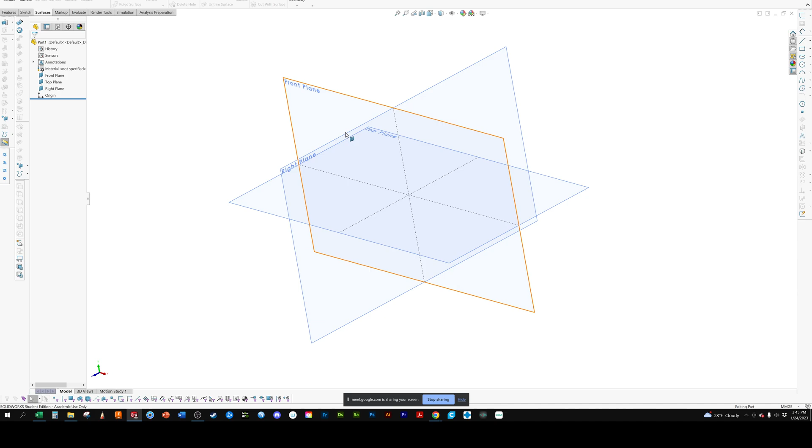So part of this too is going to be a little bit reinforcing how to build a surface model. So at the heart of it, what I'm going to do is build a six-sided model. Picture a cube but with some form to it. So, excuse me. So what I'm going to first do is I'm going to simply build my top surface.

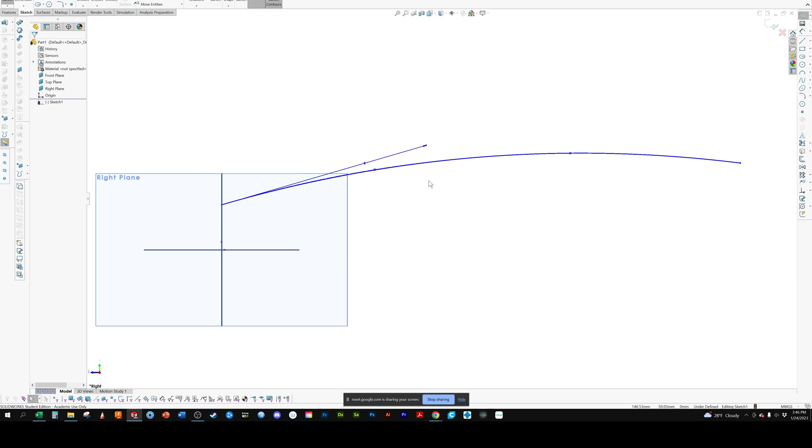And I still saw a lot of people creating curves like this with these extra points. I want you guys to try to be very cautious about that, okay? Because it makes it hard to manipulate and to edit. So if you're going to do it, you can see here, I can get that almost perfect with only using a singular, with a start and a finish. So I want everyone to try to really be cautious about not going overly complicated with things.

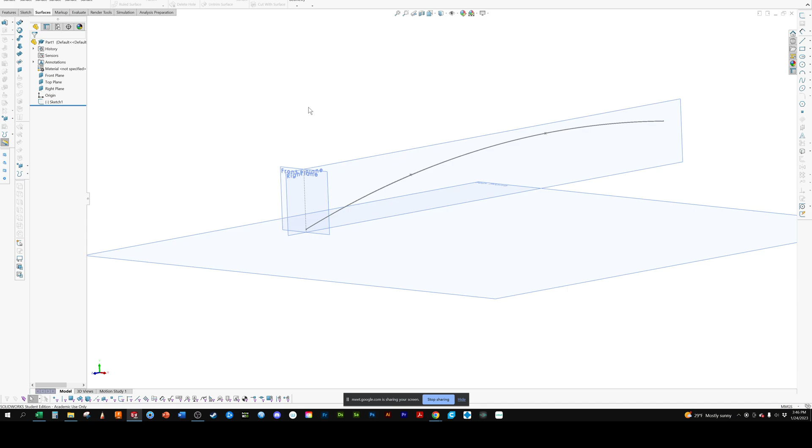So I've got that, and now what I'm going to do is I'm going to build the section, or the front portion for it to sweep over. Now, here's something that I want you guys to learn as we're building things. If I come in, well, you know what? No, I'm not going to share that right now. I'll save that till later.

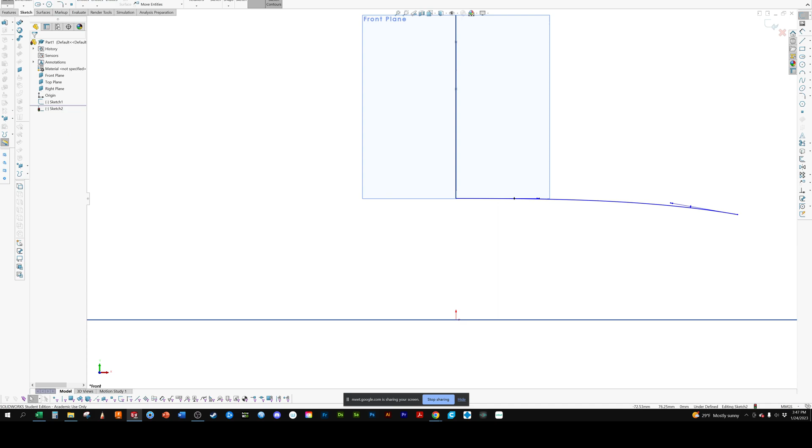So what I'm doing is I'm just building the side profile. I need this. I don't want a dip in the center because I'm going to sweep it over in half. So I want to make sure that that is mirrored or perfectly horizontal. And we've talked about that in the past. We don't want that V. We're just going to mirror this about this.

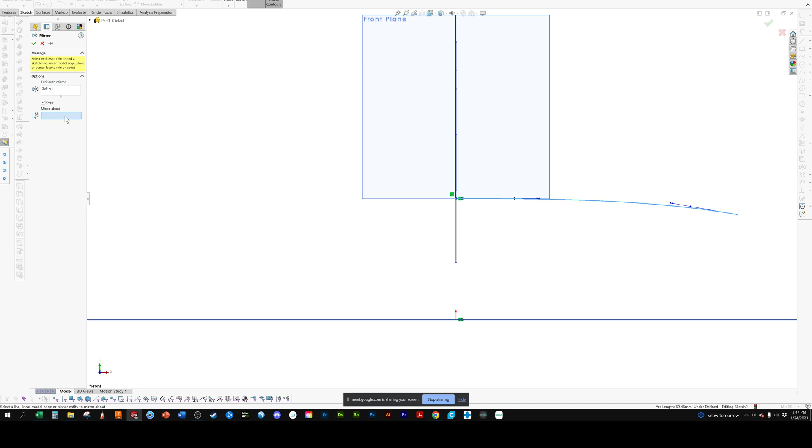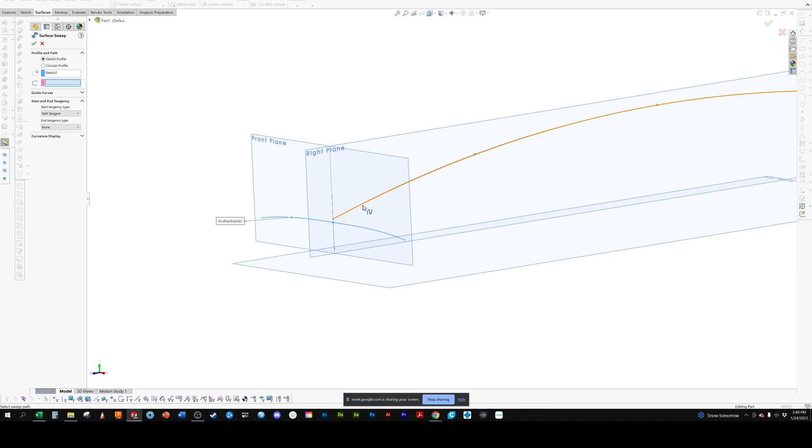So fairly simplistic top form. I can simply use a swept surface here. Get my shape. I'm not going to be too worried about everything being pinned. Now, keeping in mind again, and we'll get into this later, what is the controlling point? Do I want it up here? Do I want it down here? So we're not too worried about that right now.

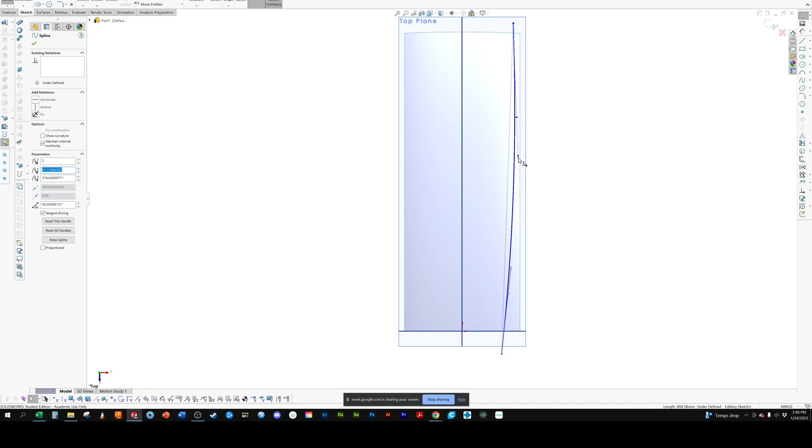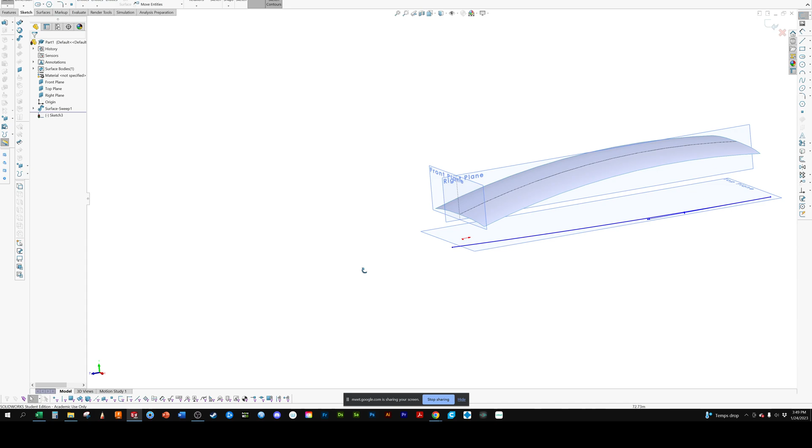So you can see what I've done is I'm just building up the top shape to build my sidewalls because I'm going to sweep another surface. And you can see what I'm doing is I'm building it. Oops. Bear with me here. I don't know what just happened there. Oh, it's because I'm still in this. There we go.

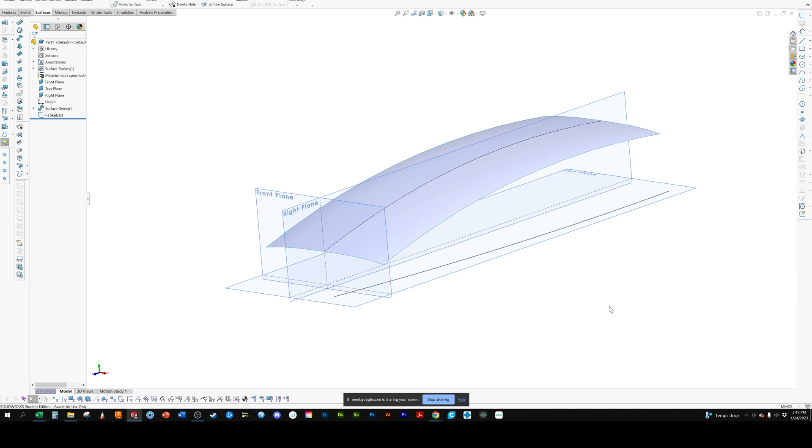So what I'm doing is I'm building beyond my surfaces. And we'll talk about why we want to do that here in a little bit. And you can see for the most part, right now, I'm just using swept surfaces.

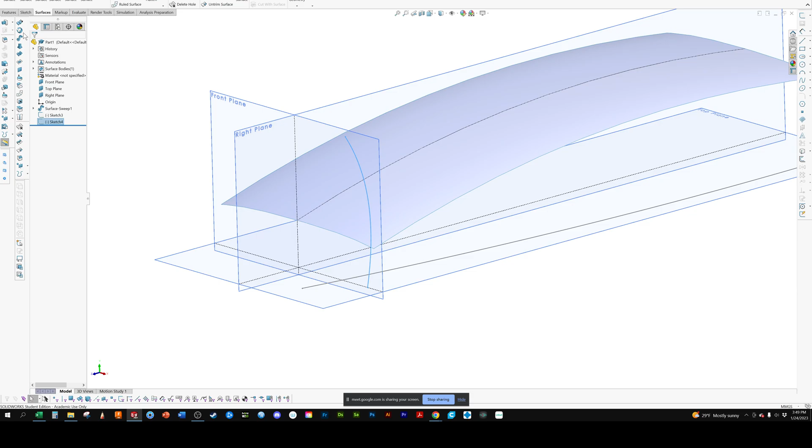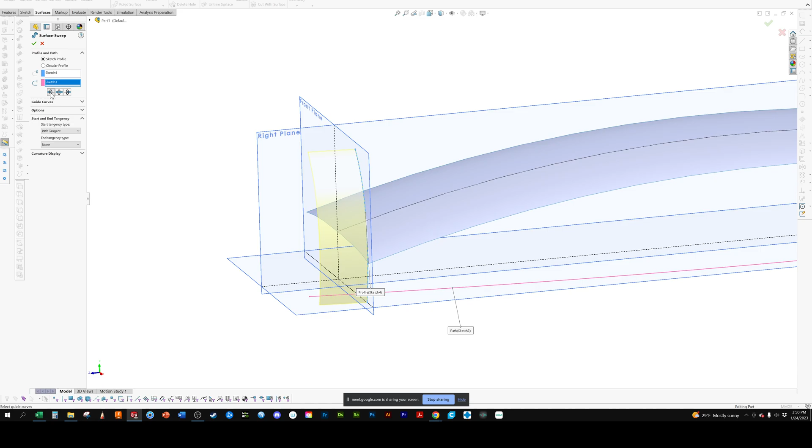And again, since I'm asking for this one, it wants to know, do you want to just go to the left, just to the right, or all directions? We'll do all directions. Now, here, I don't actually want this to be the path it takes. I want it to follow this path. So I need to go in and reverse these. Because I want to use this to trim back. And you can see there's going to be a lot of steps that we're doing to this.

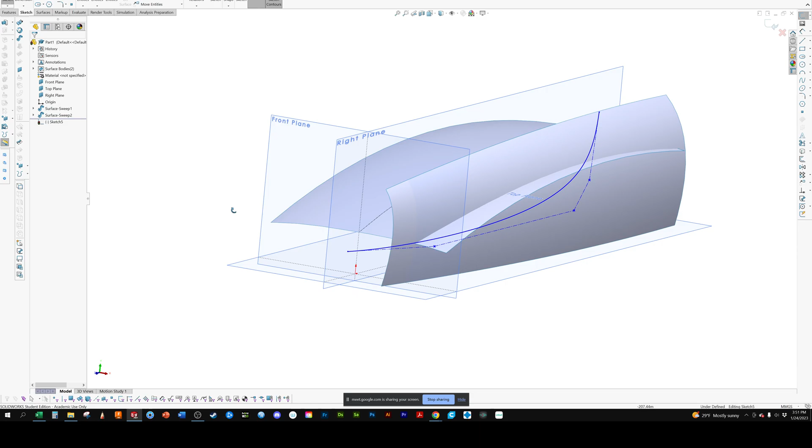Now, you saw before where I did the sketch across the whole point, and I mirrored that over. The question is, is that necessary? It doesn't have to be, because I can just mirror all the bodies over. But I always want to make sure if that is the case, oops, and I grabbed the wrong tool.

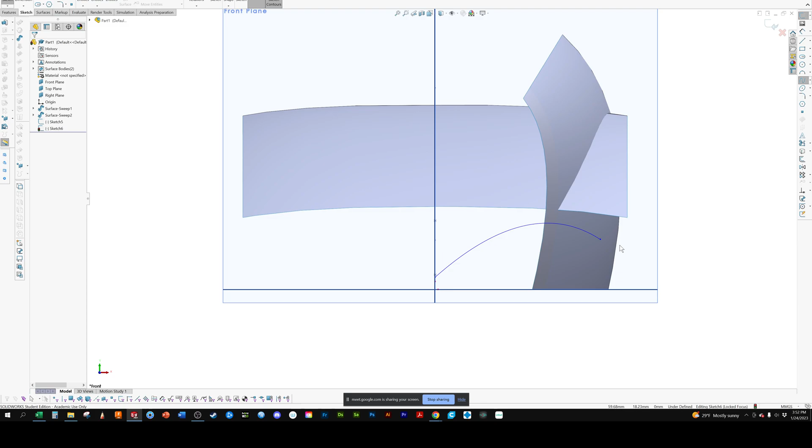Right now I'm not looking at my curvature combs, and partly because of that I pretty much know what it's doing. If I come in here, I know it flattens out, and then I know it's going to do that whale tail over here. So as you guys go, you're going to slowly learn...

My graphics card is having an issue. Bear with me here. You guys are going to slowly learn more and more and see what's happening. Why is this not... oh, that's why.

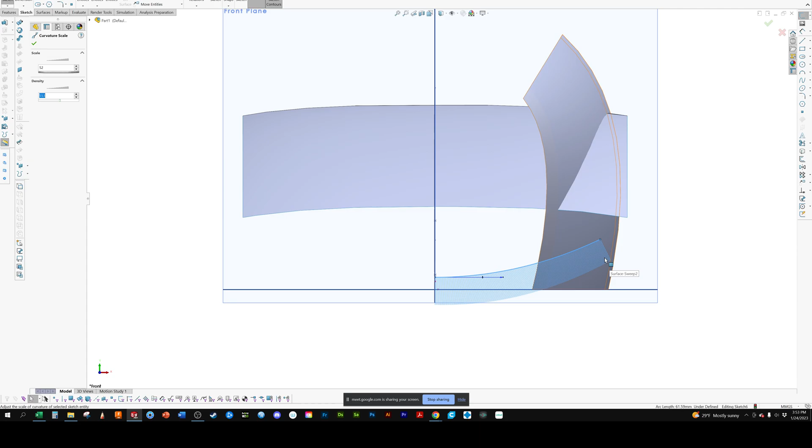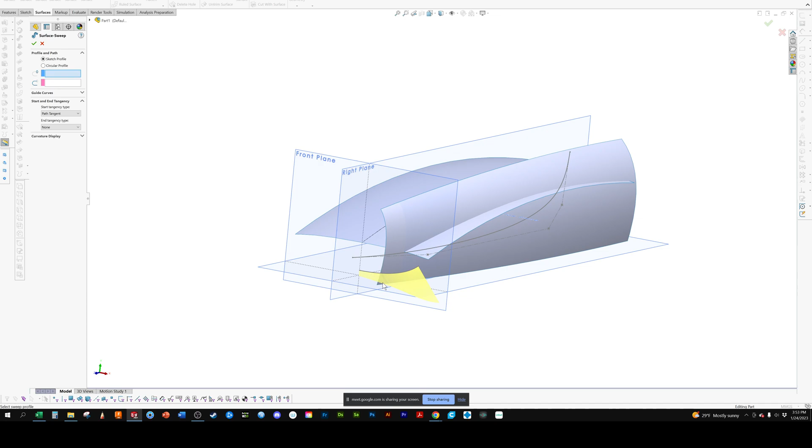What you can see is I'm creating all the sides. And you can see one of the things that's happening, if I come in here, this surface doesn't go far enough outward. It dives back in because the length isn't right, because of the surface form coming out.

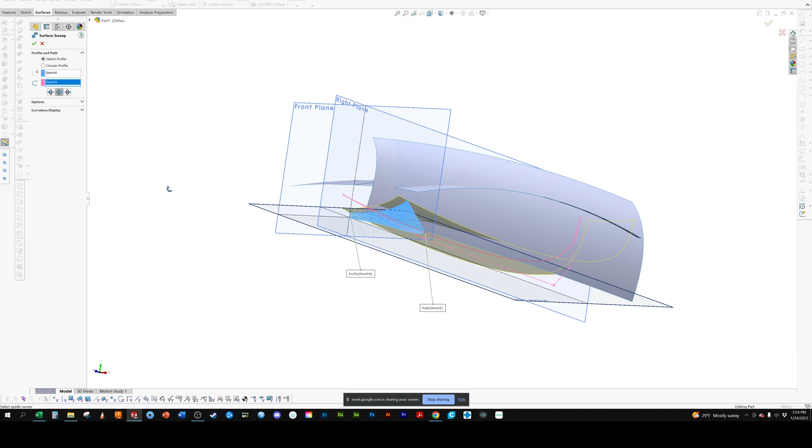So we can come in, I'm just going to edit that a little bit, and pull it out.

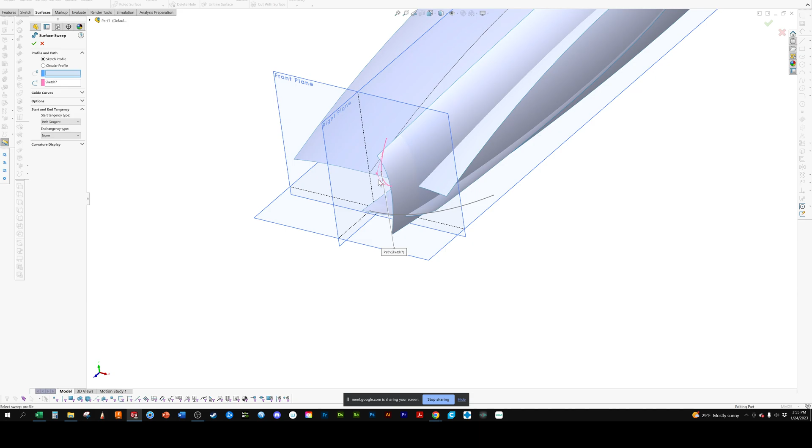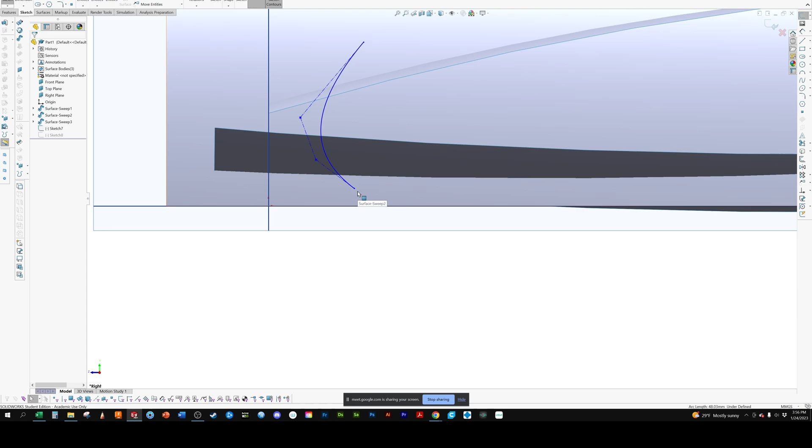Okay, so now basically what we've got is all of our sides to this.

I'm going to actually blow this away here for a second.

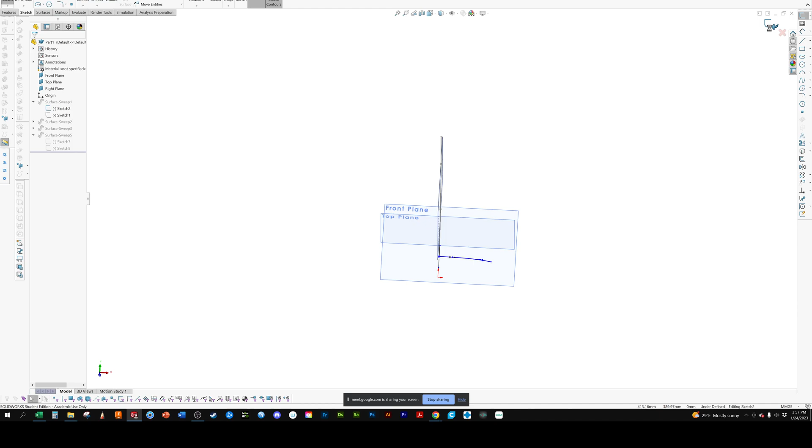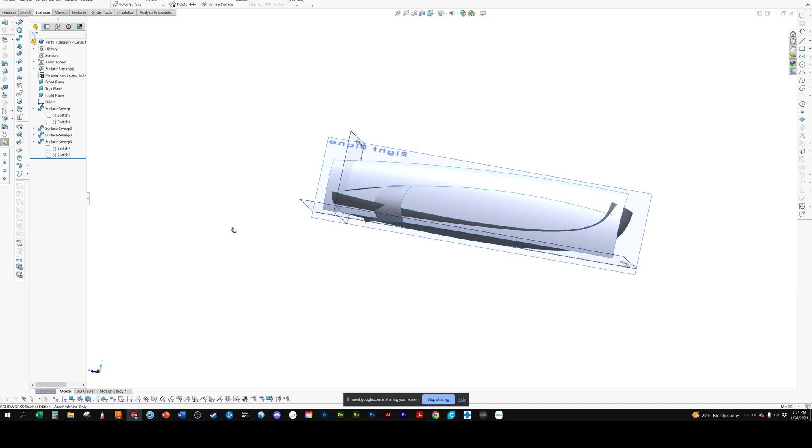So what we can do, you can see very simply that we've built our surfaces that we defined, and we kind of overbuilt them now. So we looked at each individual surface as an intersecting shape: we've got our side panel, top panel, front, and bottom.

Now, I'm not worried about radiuses at this point. This is me roughing in a form to see what I like and what I've got. But what we can do is we want to get rid of all the excess now.

So it's a matter of coming in and going surface trim or trim surface, and we're going to go standard. What that means is that you trim one at a time, so I can use this tool and select one thing.

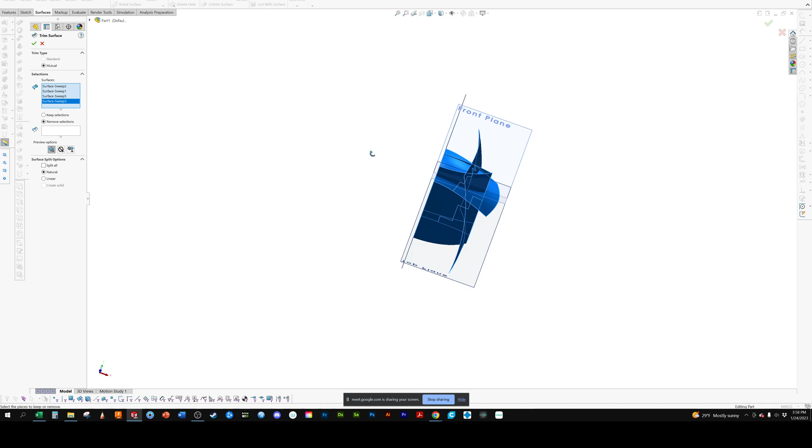And that's what happens. If I do mutual, what that means is I can select multiple surfaces and it's going to understand what it intersects with. I can come back and then select remove, and you can see here it highlights where that edge is, so we'll remove that.

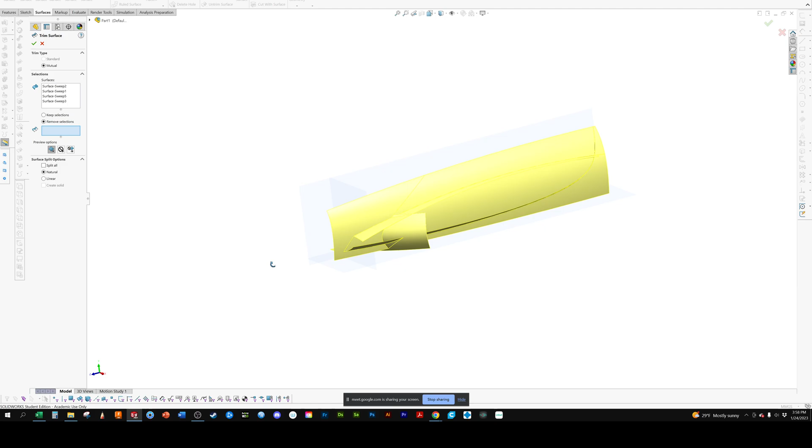And it looks as if one of our, oh no, maybe it does. It looks as if our surfaces don't necessarily fully intersect where we want it to be. So if we look at it, this top one doesn't come far enough back.

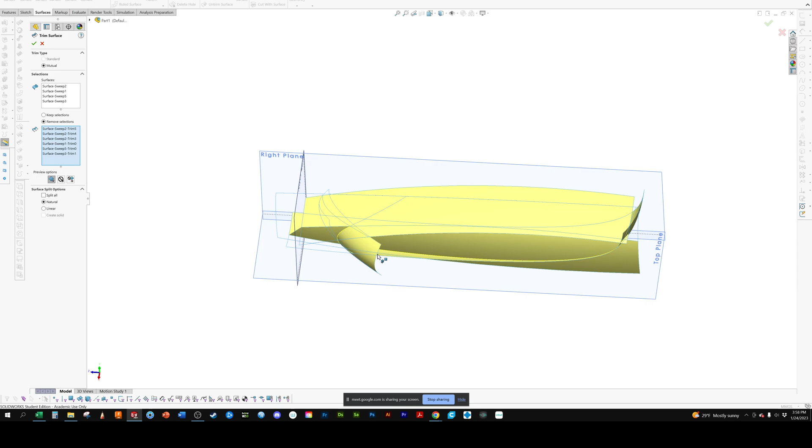We'll select that, because that's the one trick to this: we need to make sure that everything intersects. This can be somewhat tedious as a method, and it's not what I use to find the form, but it can be very useful.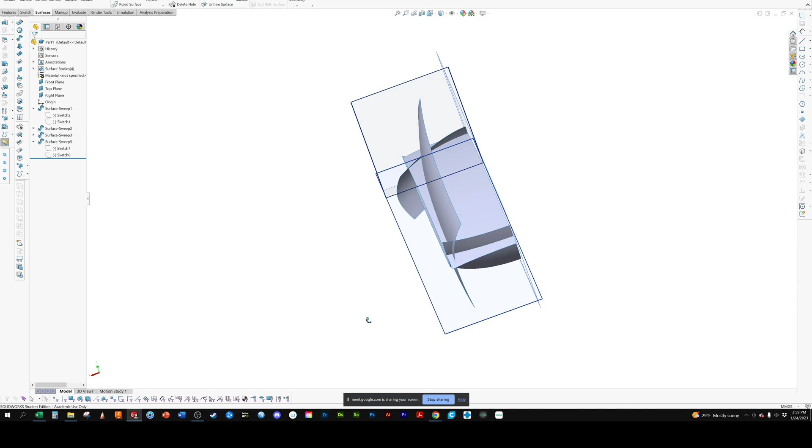And for this, let's actually trim it in mutual selections. So we're going to trim, and we're going to say all the surfaces. We're going to use that, and then what we'll do is...

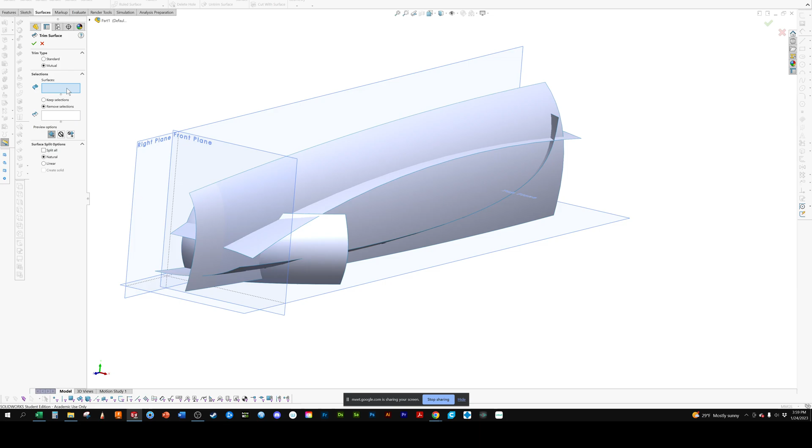Instead of removing, we're going to select keep, I think that'll be easier. So we want to keep that, we want to keep that, that, and that. Let's see if we got it right. My apologies if we didn't. There we go.

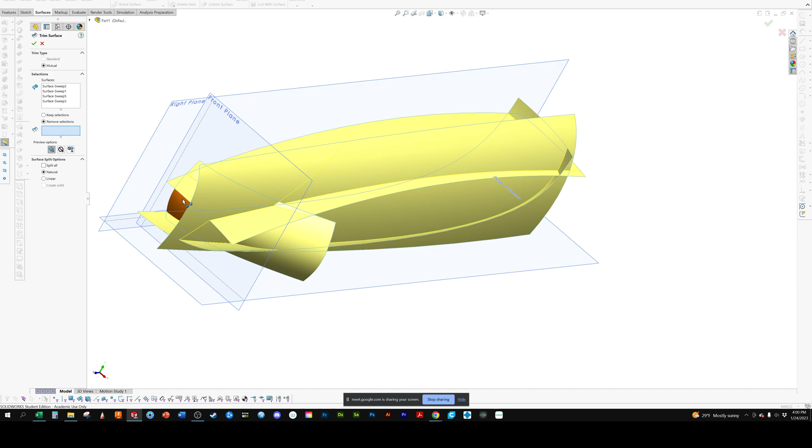So now you can see we've got our base form here with that trimming back. Now, the advantage that we have is if someone comes and says, well, I don't like the width, I need this to be back a little bit further.

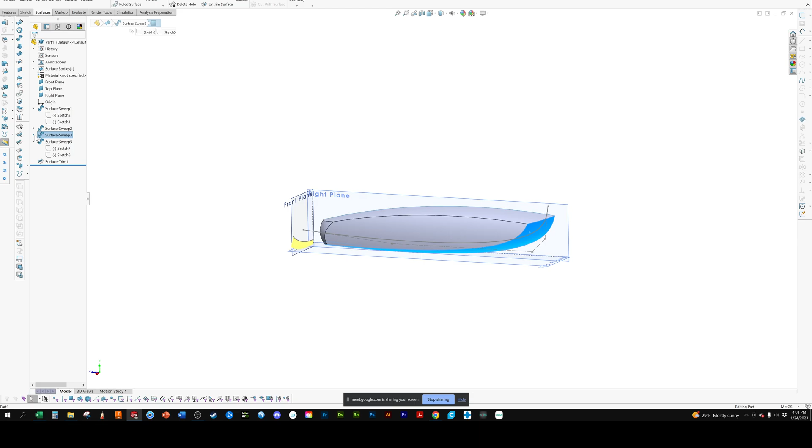So if we come in and edit this sketch, we can pull this back. Now, as long as it still intersects with these pieces, we could pull this back a little bit and everything is still going to update properly. We've got our new shape.

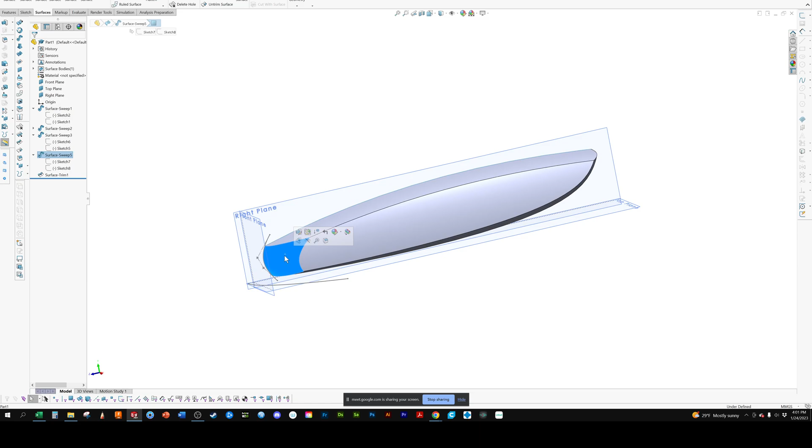We can come in and take this one and say, you know what, we want to move this forward a little bit, or we want to do this. Doesn't mean it looked good, but you can see now that I am updating things as we go.

Now, we can add knockouts, but this is going to be, hey, this is the first rough form. And this could be simply a razor or something, I don't know. But we have that ability to then start playing with the forms and manipulating it a little bit.

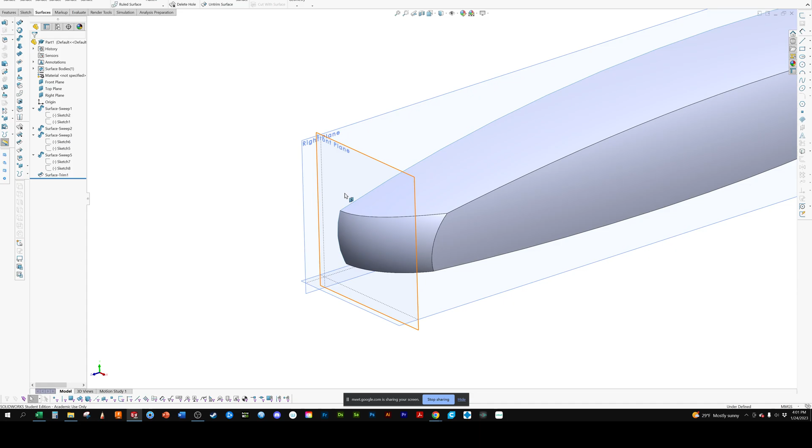So if I come in, I'm just going to make this into a solid quickly because I want to toss on some quick radii. So I'm going to come in and do a planar surface because I just want to worry about half. We'll stitch that together.

Okay, so now what we're going to do is we've got our form. It's a simple form, we can toss on some radiuses. I envision this, and the reason I didn't add all the radiuses in the sketches, as we talked about, is if I made this spline part of that radius, it would be hard to manipulate downstream.

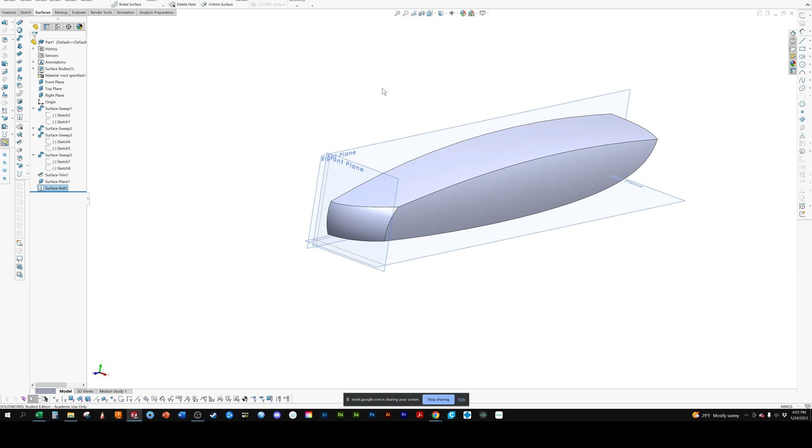Versus I can come in now and use the tools. I'm going to go with the fillet type. I want this to be... let me just see. We're going to make it curvature continuous.

And if we look at curvature continuous, circular is exactly that - it's a 3-point arc. Where curvature continuous takes the arc, follows this surface a little bit, and then down into this surface.

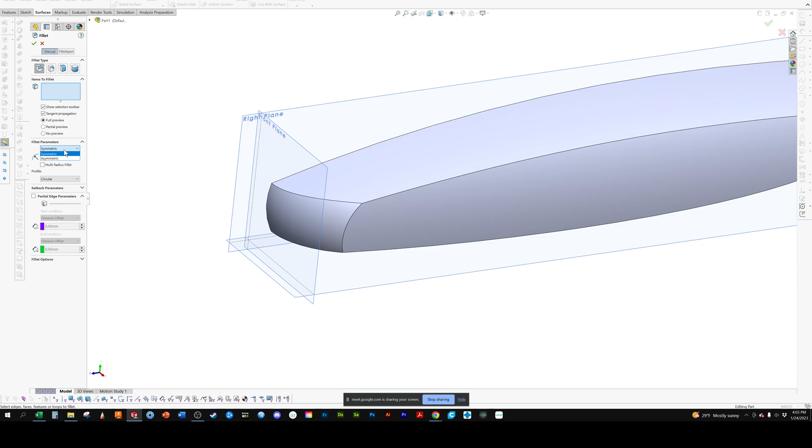What we can also do is come back and say we want it to be asymmetrical, which means instead of being 10 millimeters at the top and 10 millimeters at the bottom, we can adjust it. And we can get more of a sweep in there.

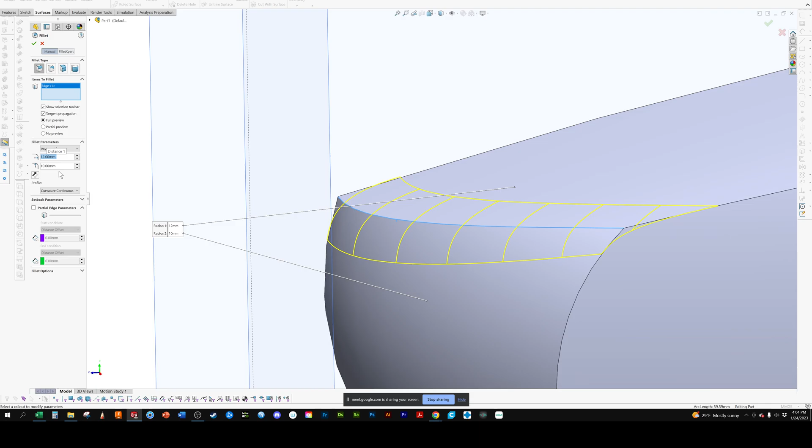Now you can also see, if I'm making this kind of a forward going motion - and you can see here, for whatever reason, it does not like what's going on.

So what we can do when radiuses like this happen, we can put that in. And we can say, do we like that? Does that look good or not? Let's actually come in and open it up. So radiuses can be surfacing too.

So I'm going to bring this into KeyShot quickly. So I know it doesn't look good - I don't actually need to bring it into KeyShot to know, but I want you guys to be doing that. And again, right now...

Why did that not go in there? So much for you guys right now is subjective - you may think it looks good because someone hasn't explained to you why it doesn't necessarily look good yet. I'll talk to that a little bit here in a second once I get this to come in properly. There we go.

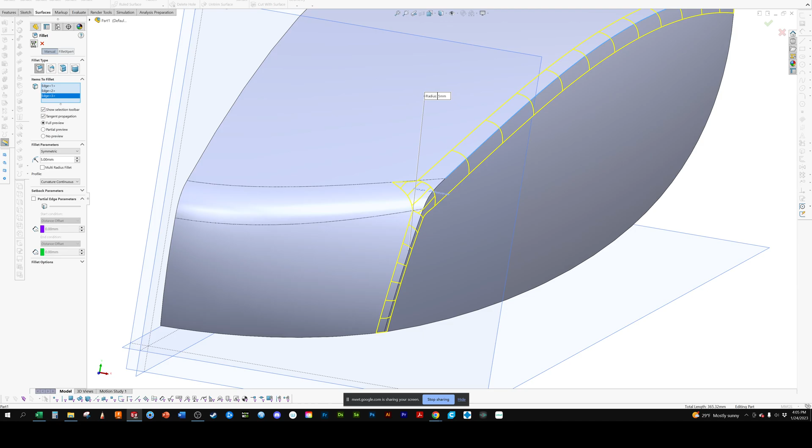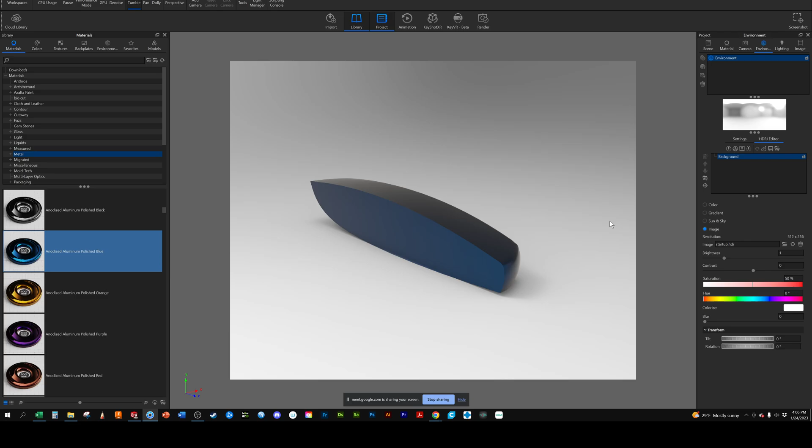So the reason it doesn't look good - see how it has no direction? It kind of gets in there, it doesn't know what to do, it's got that wobble. That's what you can see in this view. It looks decent because you can kind of see a highlight there, but you can see here how it stops and has a weird build. So we want to avoid that.

If my view is I want to have this radius come up and go along there, but I want it to follow this path first, what do I need to do? Now, many times - another command we can use, and I think someone had played with it - what we can do is tell the software we want to do a face fillet.

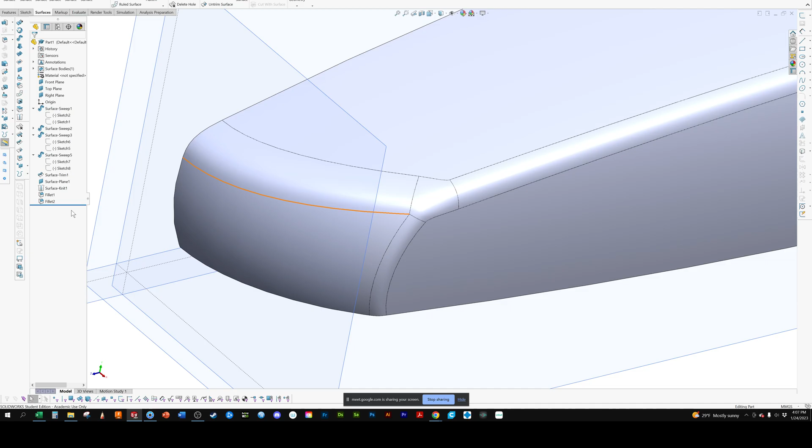And what we're going to do is select the faces that we want it to follow along, so it gives the software a little bit more information. So if I select this face, this face, this face, and we're just going to leave it dead end there. Then we'll come back and select this face. What we want to do is - see how the arrows are pointing outward? We want them to point inward, because the radius isn't going like this, it's going like this. So we just want to come in and flip those face directions, and flip that face direction there.

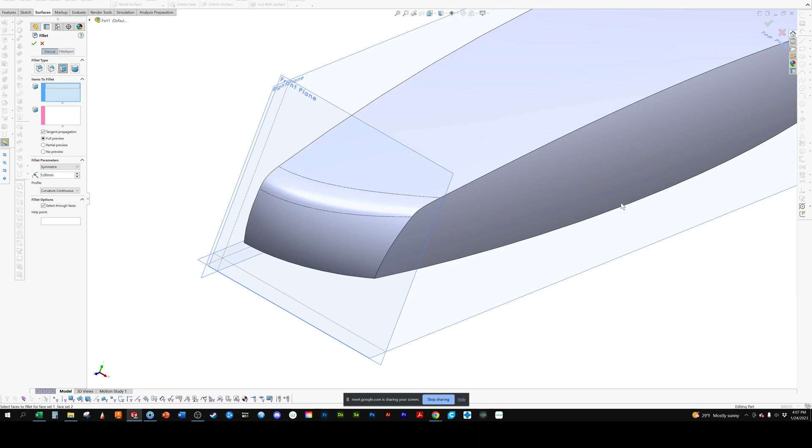Huh, is there an issue there? So it looks like there may be some issue with this fillet. Let me just see something here. We're going to come in.

As we talk about form, this is where it's extremely important, because you want everything to be nice and smooth, so you take the time to do it. Surface modeling can take much longer than solid modeling in my experience to get that shape and form.

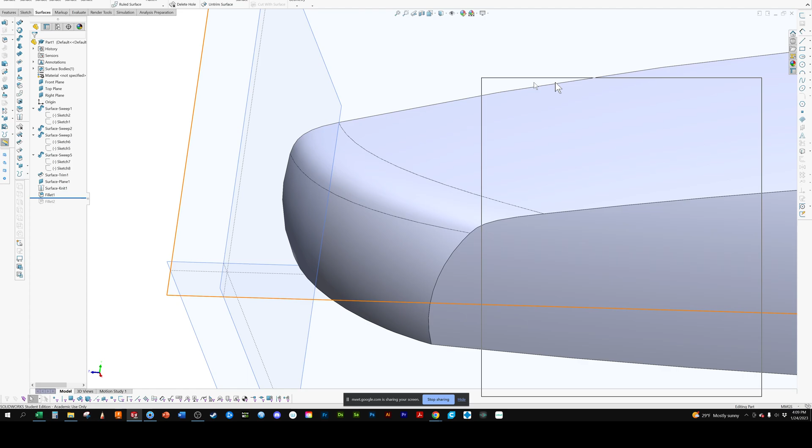Sorry, I'm just over here - what I'm doing is fixing my image quality to make sure that I'm seeing something right, because it looks as if it's doing it there.

So what we're going to do is - I like that radius, but we're just going to scroll back here. It may be that my form cuts too far over there, but I like that. So I'm going to still try, and we're going to come in and go face fillet there, and there.

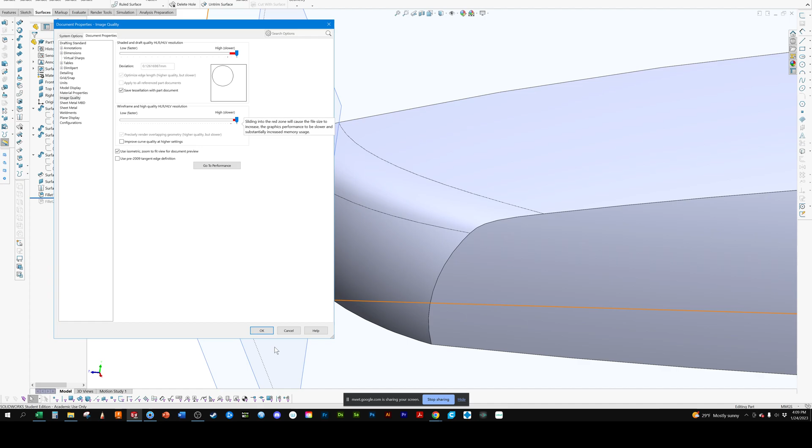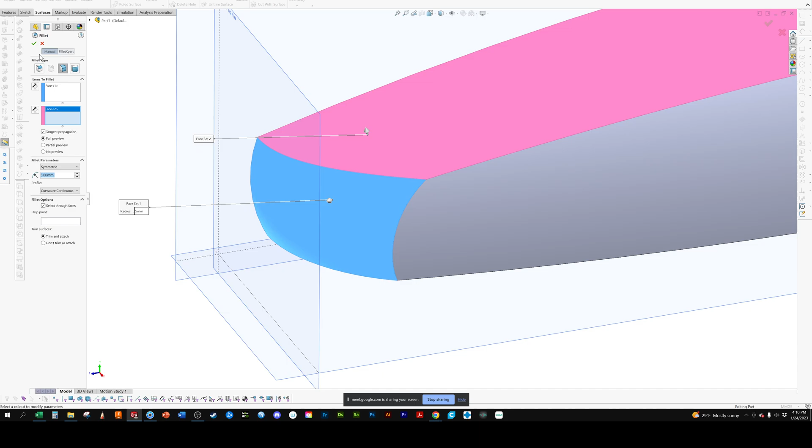And I think we had that at 10. Okay, so now let's see if that works.

So again, first thing I want to do is I'm just going to try to do a normal fillet. And you can see that we're still getting that problem going on in there. And this is the nature of the shape of the geometry. So let's come back and we're going to do the face fillet.

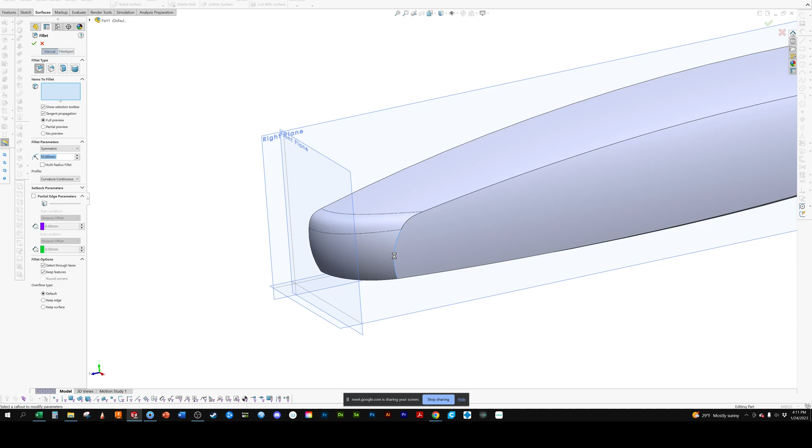And it's not going to like it. Okay, so it does not like it. This is where I'm going to show you guys something, that as we do the surfacing and build things in, I'm not going to let that change what I want to do. So what I'm going to do is come in and cut out the space, and put in my own fillet.

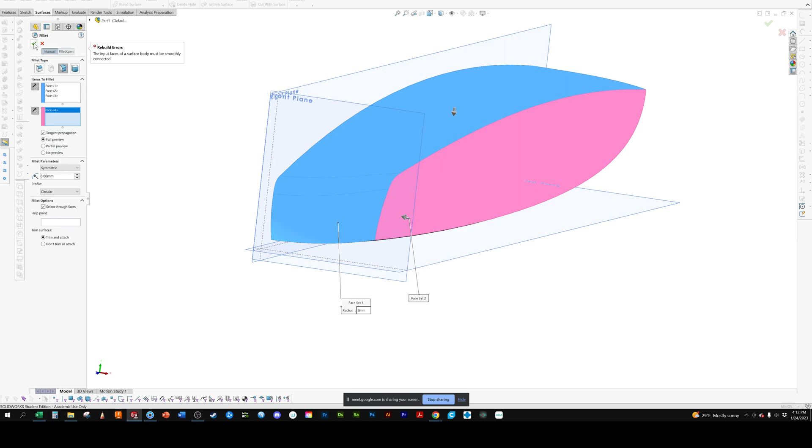So what I'll do is come in and draw a sketch, and I'm just going to do this really quick. And I actually have more control over this, and there's a variety of ways I can do this. I could draw this on, I could offset surfaces, but the point here is I just kind of want to show you, because we talked about this before, now we're going to do kind of the patch.

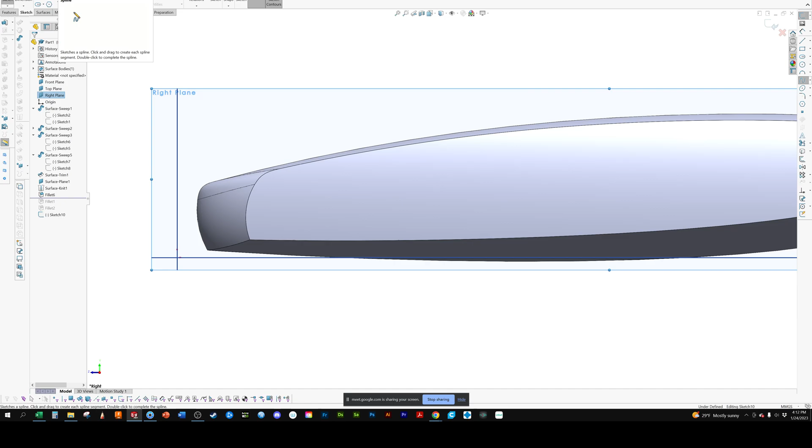So we'll go insert, curve, split line. Oh, whoops. I forgot this has to go all the way through.

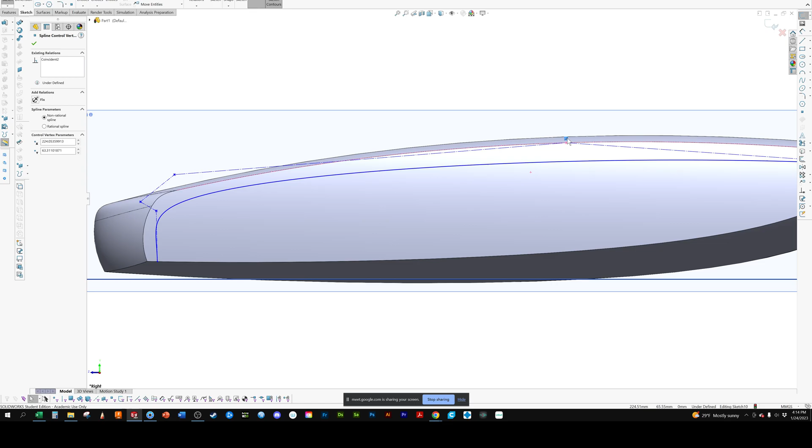So we can come back and trim out this. Sorry, what am I trying to find here? Delete face.

And basically what I'm doing is I'm creating the path that I want these surfaces to follow along.

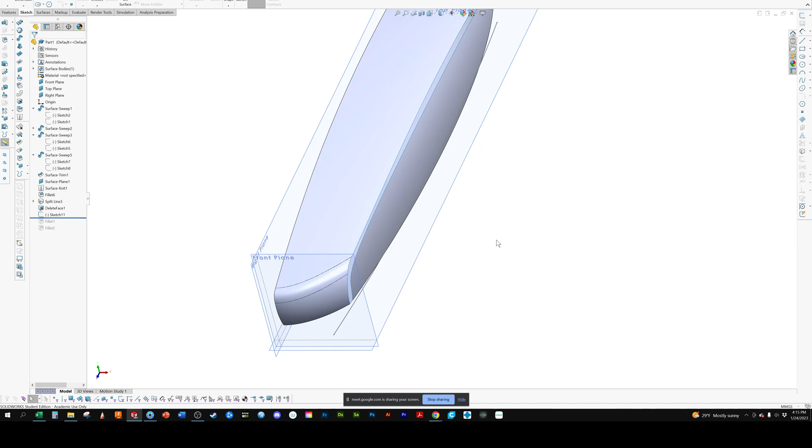But if I come in, I now can, if I want, create a curve along here and sweep it. So if I come in, for this, what are we going to do here? Let me just do one thing, because what I want to do is sweep the curve from here to here, but I need it to be able to stop at a certain point.

So I'm just going to come in on the side here. Yeah, let's just do this. So this is kind of ugly, but it's going to get my point across.

Okay, so what I can do now is come in and loft from that edge to that edge. And if you recall, we have start constraints and end constraints.

So I can say on this start constraint, I want that to be tangent to face. And it adjusts it. I can then come over here and say end constraint, I want that to be tangent to face. So now it's starting to build in that radius. Now I can adjust these and get the different shapes.

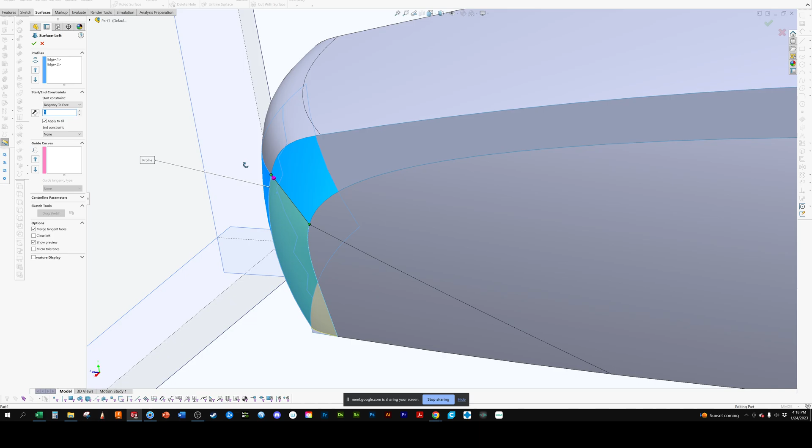What I can then do after that, let's say that's what I want, I can come in and do a boundary surface. Clear that, and I can fill this gap in. I'm going to say, hey, I want this as my path, and I want to follow this.

Oh, for some reason it grabbed that. There we go. And I want it to follow this.

And then part of the reason why I did the boundary constraint is because I'm going to try to make it, and I'm going here really sloppy, so I don't know if it will. I want it to be tangent to that face. And then at the same time, I want it to be tangent to these faces. And remember, that was the advantage of the boundary surface, because I'm giving it boundaries, but I want it to be doing certain things. Now, it's still not very pretty.

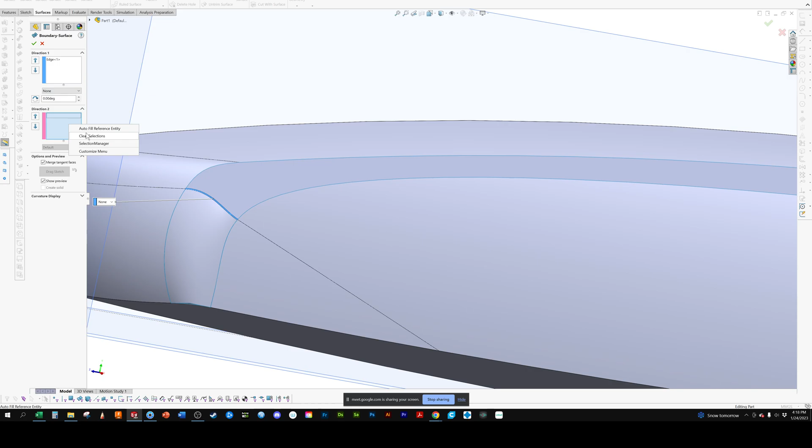Question? I was just going to ask at what point, because it's like that troubleshooting where I feel like I'm just not there yet. You know what I mean? Like figuring out that problem there. Oh, so here's the reality. I'm faster than every one of you. It's not that I'm better than you. It's that I've run into more, oh, this doesn't work. So it takes time. As you learn the tools more and more, it's going to get better and better for you. So it's not something that's going to happen overnight, unfortunately.

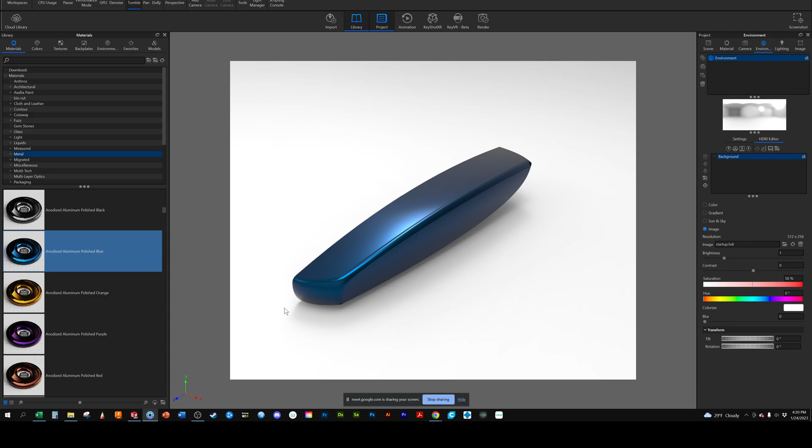When I first started 3D modeling, imagine the forums were out there. You know, like chat groups, user groups. I was on there constantly. So as we go, it's just going to be a matter of how many different ways do you know how to do it? And do you know what the problem was? I think the problem there is I was asking it from a geometric standpoint to do something that was not the nicest. Partly because I haven't thought this model out very well. Does that make sense? I know it's not a great answer to say, ooh, tomorrow you'll get it. Yeah, no, I got it.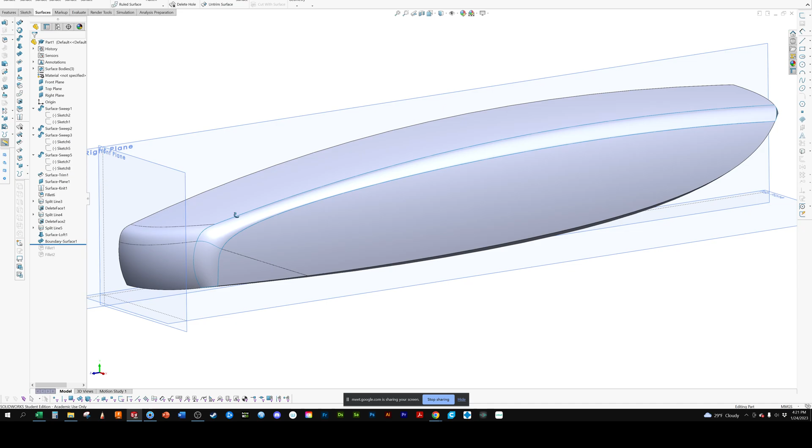Thank you. Yeah, okay. So what we end up with now is something that is just ugly. So here's the hack. I don't know why it's all faceted like that though. This is just going quick. But this is a sketch model. Sometimes it's a matter of just the rough sketches. And you guys will do this as well. This is my first pass. This is what I wanted to get. This is the form. Okay, what else do I want to do with this? It's not the prettiest, but it's a sketch model. It's for me to get my workflow. It's for me to get the overall size, shape, and feel of it.

I may prototype this purely to put it in my hand. If all I'm going to do is put it in my hand to make sure I got the ergonomics right and the shape right and the feel right, well then I don't need to make sure that my highlights are perfect. I don't need to make sure that this here is perfect. It's a sketch model. It's loose, it's rough. I could take this and bring it into KeyShot, turn it into a shaded image, and then very easily start sketching over top of it. Okay, I like this overall form. I think it looks good. What's it going to look like now instead of me doing more details, but coming into Sketchbook?

Let's just do this here quick. No, I'm not going to even bother to do that. Coming into Sketchbook and then using this model to sketch over top. So this is what we were talking about before, where it's a quick model. You bring it in, some quick surfaces that we laid down. You can start sketching over it and be like, okay, well, you know what? Maybe I don't like this form here. Maybe I want that to be, here, let's do this. Maybe I want that to be a little bit more bowed here, in the middle,

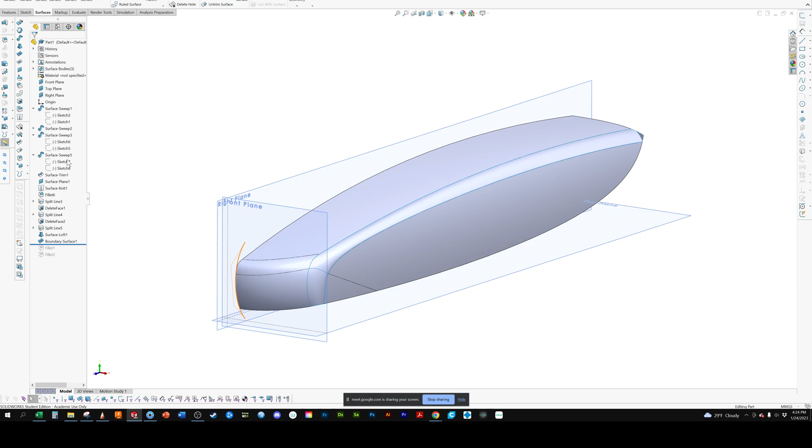and I'm gonna actually do what I say don't do, because I'm just doing a quick sketch model. I'm gonna drop in a spline point, and then I'm gonna say maybe I just want this raised up a little, because I want that more of an arc. So there, now I've got a little bit of a different look to it. It's more rounded. I could save this out. Maybe from a standpoint here, I want this to dive down more.

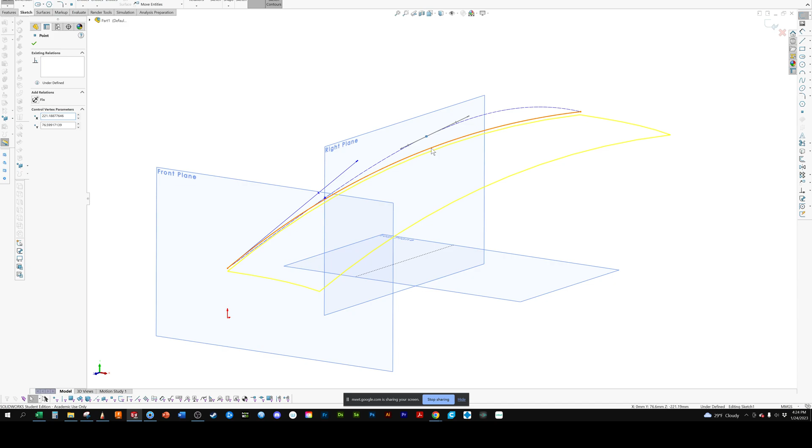Maybe we wanted to do more of a hump up in the section. You know, now, I moved this in so the trimming didn't work. So it blew up a few things, but that's partly because I wasn't thinking. But now all of a sudden, I'm getting a different feed, form, and a shape. Oh, I start liking that a little bit better.

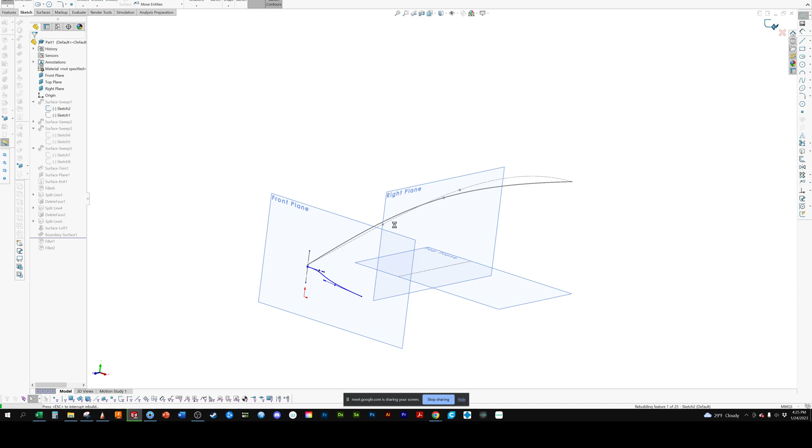Let's see, can we fix that easily enough? No. But now I could take that form, and now all of a sudden you see I'm getting a variety of quick forms that I can use to sketch over top of. I can do this again and say, okay, well, maybe I want something like this, and I'm just going to scroll back here.

When you're doing the rollback, do you roll back to the sketch that you want to edit? Oh, yeah. So what I'm doing is I know what sketch I did. So like normal, here's my top surface, my side surface. So I kind of know what sketches are what ones. So all I'm doing is I'm not even necessarily rolling back. I'm just editing that sketch.

And you can see here, I don't always have to go in to edit the sketch anymore. But, well, here, let me show you something. So I can actually just go in. See, now if I start going too wild, I've blown it up. There. So if this was the base form, I know that, hey, I can go in and I'm going to edit this a little bit.

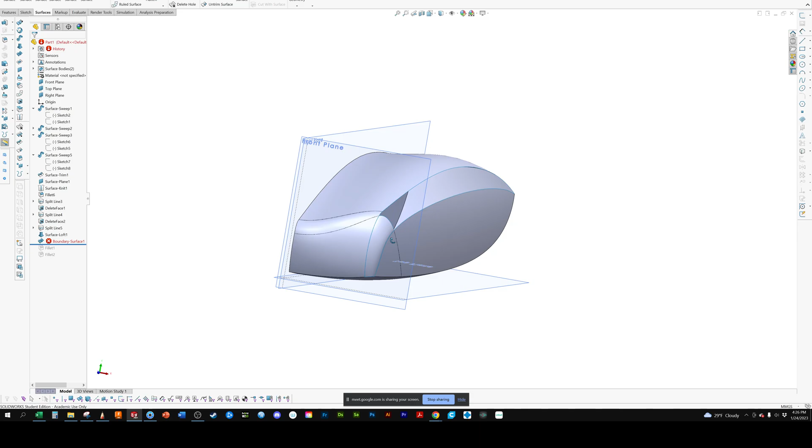I can come in and say, well, I want that to kind of curl. I want that to curl under more. But you can see there, I blew it up because I pulled it too far out. So I didn't overbuild my surfaces enough for that dramatic of a change. Does that make sense? Yes, it does. Thank you.

Okay. I've had some times where they're like, oh, you built this so that we could do... oh, we just need to make it like 4 inches wider. I'm like, I didn't build for 4 inches. Who the hell's making 4 inches wider on a blender? And then you can go in and add your other details in there. But you can see here how by overbuilding it, it allows me to make some different forms and different shapes.

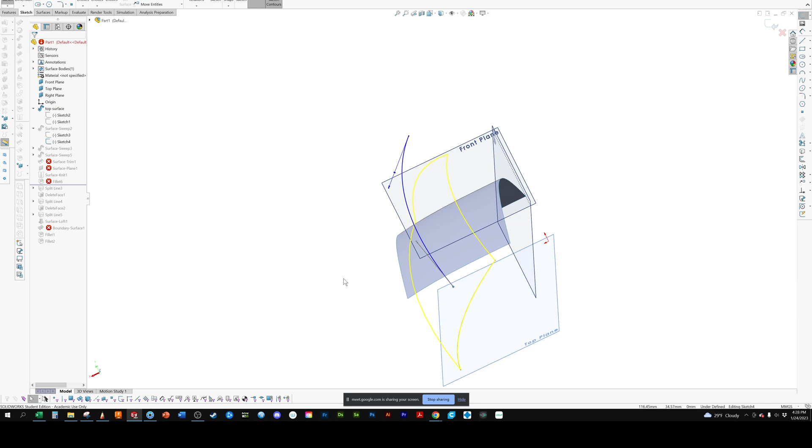Same as back here. If someone says, you know what? Let's see, I want to just see how far I went back here. So you can see here I only went this far back. Let's say someone said, well, we want to have that back pull out to here. Well, then I simply have to remember, okay, great. We'll pull this out further. We'll really overbuild it. And what I'm going to do, yep.

Now, I've got that much space to build it, but this isn't far enough back. So if I move this out to here, it's going to crash. So that means that before we do that bottom surface, the top or the side surface would need to be built out. Now that's one of those things wherein you want to pay attention to what you're doing.

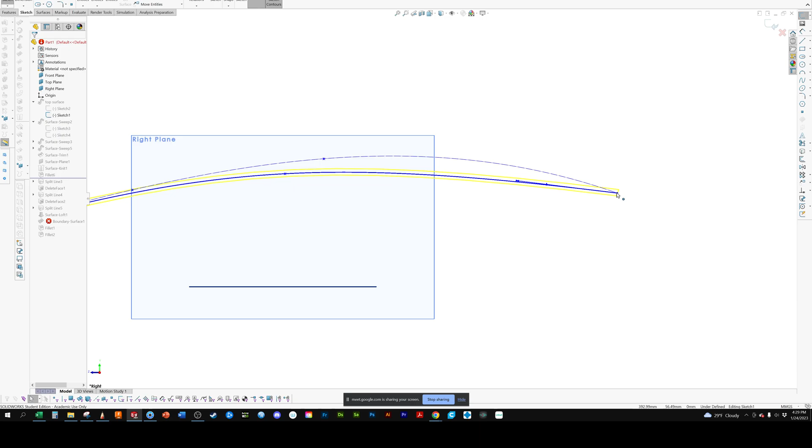And usually, like if I'm working on a handheld blender or a power tool, I'm going to overbuild the surfaces, but I'm not overbuilding them by 5 inches or 10 inches. Something's gone drastically wrong if all of a sudden someone says we need another 5 inches of space. It's more for pushing and pulling.

But at the same time, here's something that I forgot to show you. Let me do this. So I overbuilt the top surface. Well, let me take the side surface and I'm going to snap it to that edge on that top surface. Okay? Everything updates. Now, I'm going to do this really drastically. I'm going to modify my bottom surface.

Because we overbuilt things, we have a lot of room. Keeping in mind, I'm going to overbuild it, I've got to pay attention to what my shape looks like. And I'm going to build it to there. Everything's going to update. Now, let's say for some reason I wanted to overbuild it even more. You saw how I snapped that side sketch to the top surface edge.

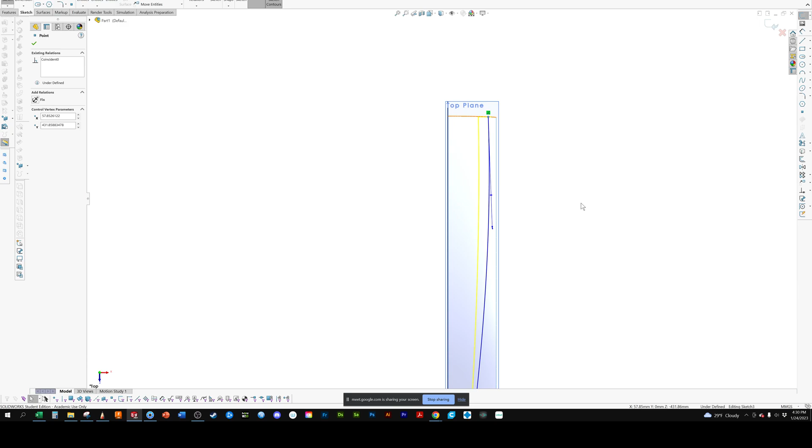So if I come in, I'm going to take this, we're going to pull it out further, and you can see my curve is getting horrible looking. It's so flat. The side surface came all the way out with it. And the reason the side surface came all the way out with it, whoops, was because I had snapped the